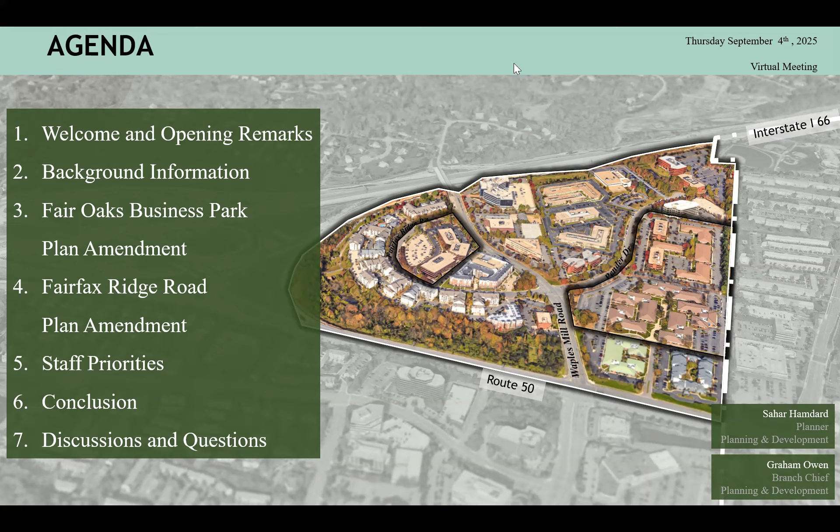Thank you, Commissioner Thomas. And real quick, if I could, I just want to say thank you to everybody that's here. This is your time to learn more about the project, ask questions, get some answers. This will be the first of several opportunities. We have another opportunity, I think, with the Springfield Land Use Committee on the 7th of October. And then, of course, it'll go on to Planning Commission and Board of Supervisors after that. So plenty of opportunity to weigh in, but we got a lot of people here and look forward to hearing your comments. That's all I got.

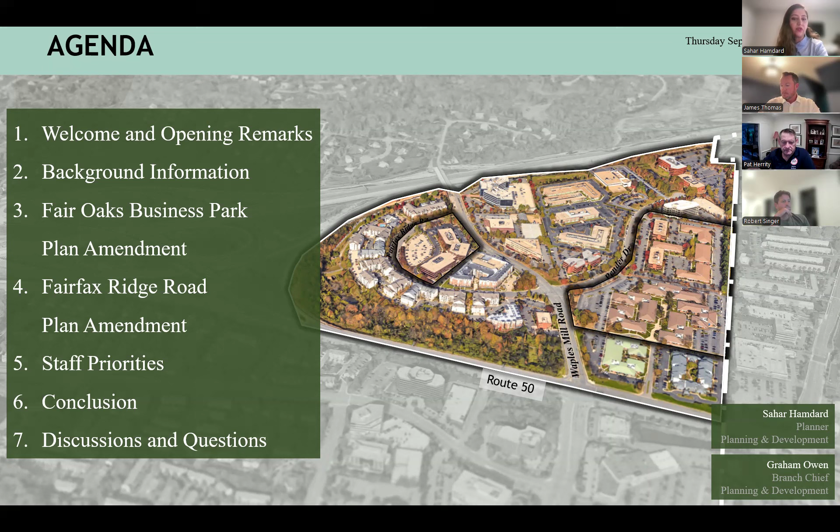The agenda for today's meeting is to discuss the two site-specific plan amendments, Fair Oaks Business Park and Fairfax Ridge Road. We will go over information regarding the comprehensive planning in Fairfax County and the staff priorities for plan amendments. At the end of the presentation, we will have time to discuss questions, comments, and concerns, and we want to hear from you.

On April 11, 2023, the Board of Supervisors authorized the consideration of the Fair Oaks Business Park and Fairfax Ridge Road plan amendments, both of which are located within Land Unit K of the Fairfax Center area in the Springfield Supervisor District. The Board of Supervisors requested that staff consider and evaluate the Fair Oaks Business Park plan amendment for residential mixed use up to 1.2 FAR and 5 to 6-story buildings, consisting of 750 to 900 residential units and 60,000 to 120,000 square feet of office use, ancillary retail use, and potential continuing care or assisted living uses.

Also, the Board of Supervisors authorized the Fairfax Ridge Road plan amendment to consider an option for residential mixed use on the site for up to 400 multifamily dwelling units at 1.5 FAR and 70 feet in height, as well as 2,500 square feet of ground floor retail. Both plan amendments are concurrently under review with rezoning applications.

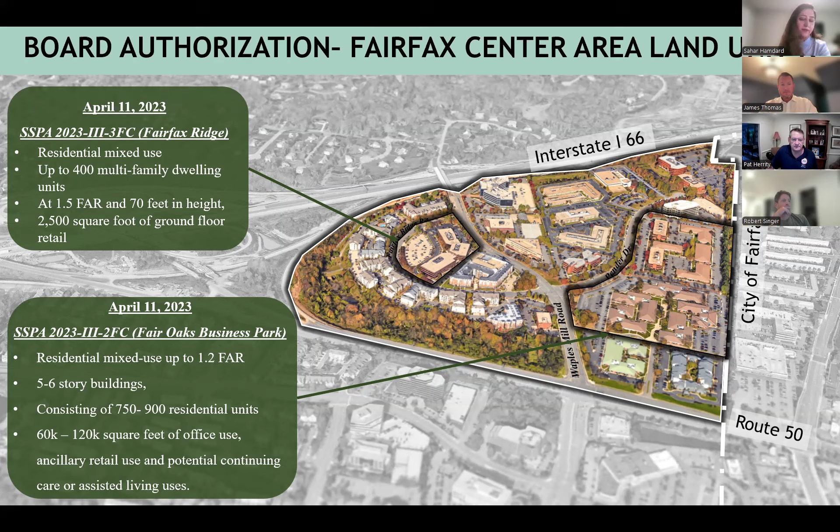During the review process of these amendments, the main comments raised in agencies' comments were the need for major sewer enhancements, interparcel connectivity, and urban parks to serve future residents, all of which have led to an agreement amongst the staff and the supervisor's office that a broader area planning study is needed.

On June 25, 2024, the Board of Supervisors authorized a planning study for the entirety of Fairfax Center area Land Unit K to allow for a comprehensive planning analysis for the broader area, while also allowing the two SSPAs to proceed as individual proposals with consideration of commitments from the SSPA nominator to enhance the sewer capacity in the area to meet the need of future redevelopment potential for the area served by pump stations.

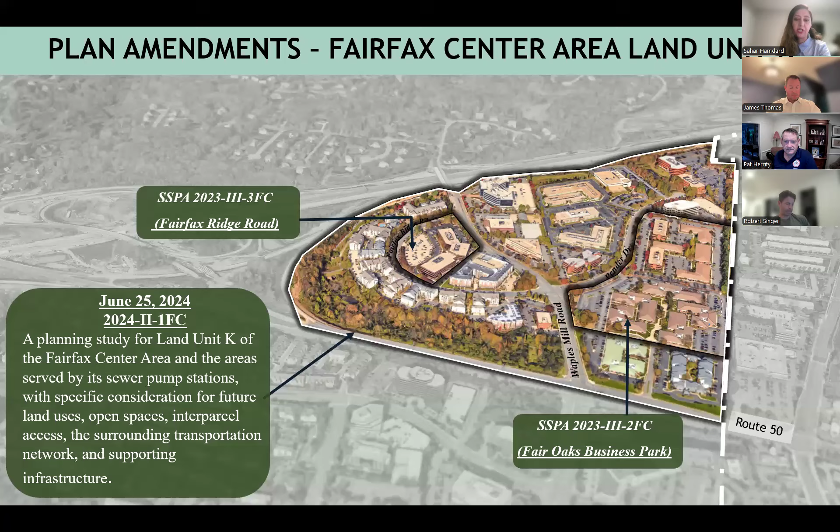As a result, the two sites, Fair Oaks Business Park and Fairfax Ridge Road plan amendments, are proceeding as individual plan amendments as part of the phase 1 study, which includes this community meeting, with the Planning Commission scheduled on October 16, and the Board scheduled for both plan amendments on November 18.

The phase 2 study includes the Land Unit K planning study, and a comprehensive land use, transportation, and park analysis is in review. It's expected to be scheduled for a community meeting and public hearing in fall or winter 2026, when the transportation study is finalized.

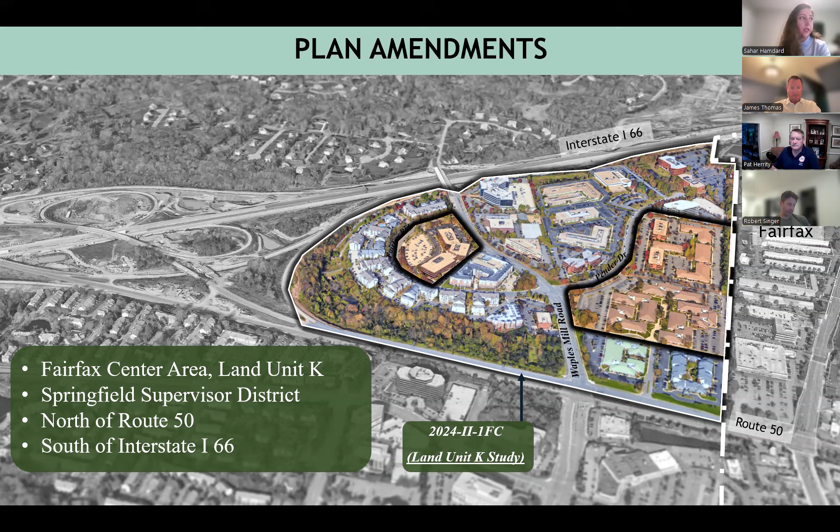Both sites, Fair Oaks Business Park and Fairfax Ridge Road, are located within the Fairfax Center Area Land Unit K, which is north of Route 50, south of Interstate I-66, and east of the city of Fairfax. Land Unit K is developed with office uses, light industrial, hotel uses, and residential uses.

The 22.64 acre Fair Oaks Business Park site is located southeast of the intersection of Waples Mill Road and Pender Drive, currently developed with one-story office buildings totaling 331,000 square feet with associated surface parking. Approximately 1.75 acres of the site is developed with Inova Care Center, which provides behavioral health services for children.

The site is surrounded by office and institutional buildings to the north and west across Pender Drive, a hotel with restaurants, office buildings, and grocery stores to the south, and multifamily and townhouses, residential uses, and commercial uses to the east and city of Fairfax.

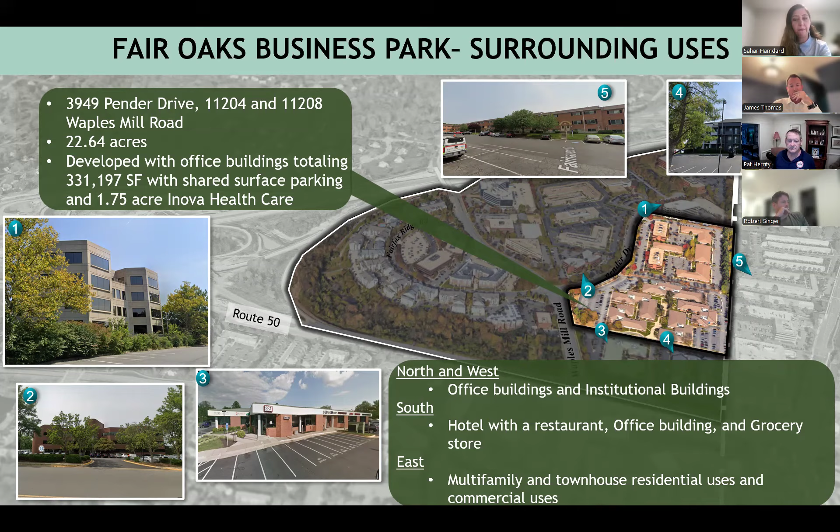The 6.2 acre Fairfax Ridge Road site is located southwest of the intersection of Fairfax Ridge Road and Waples Mill Road, currently developed with an office building totaling 219,000 square feet with an associated parking structure.

The site is surrounded by multifamily residential uses, including the 420-unit Fairfax Ridge condominium community to the north and west, and the 150-unit Radiant at Fairfax Ridge rental community to the south. Office and institutional uses are located to the east across Waples Mill Road.

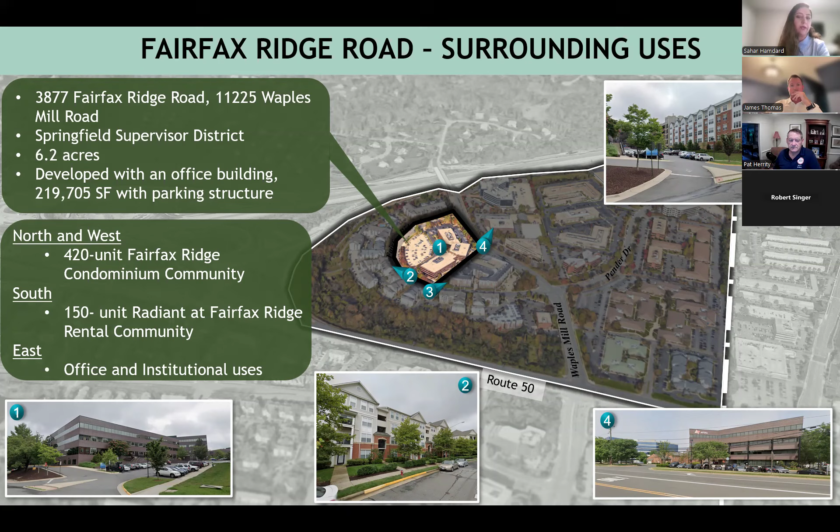The adopted plan for Land Unit K of the Fairfax Center area recommends office use at 0.25 FAR at the baseline and 0.5 FAR at the overlay level.

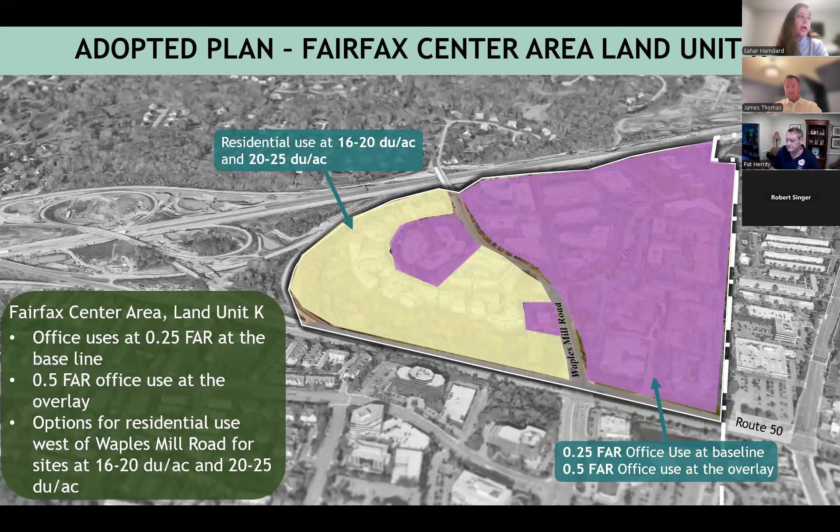Areas west of Waples Mill Road, the plan also recommends site-specific options for residential use at 16 to 20 dwelling units per acre. The model apartment building off Aristotle Drive has been implemented with 16 to 20 dwelling units per acre, and the Fairfax Ridge community has been implemented at 20 to 25 dwelling units per acre.

Additionally, the comprehensive plan's vision for the Fairfax Center area includes guiding planning principles, which provide opportunities for infill development to support the creation of additional activity nodes that include residential, retail, office, hotel, and/or civic uses.

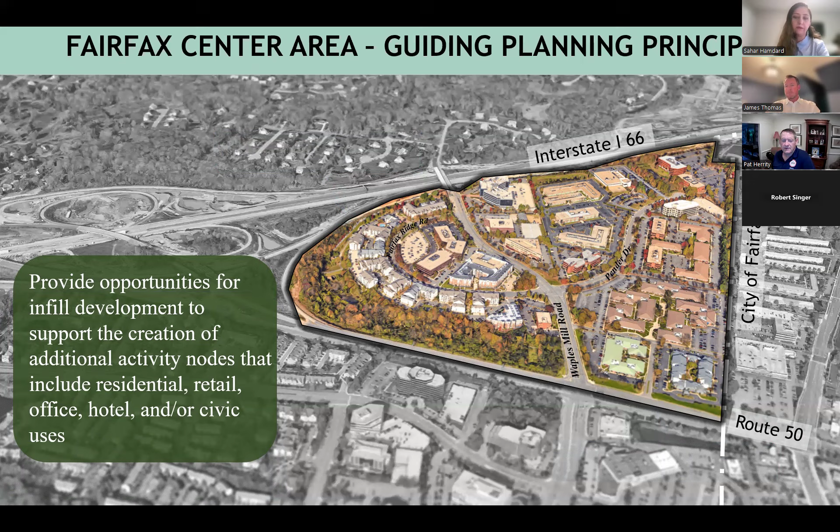Now, what's the comprehensive plan?

The comprehensive plan is the county's primary policy document to guide the use of the county's land and natural resources over the next 20 years. It is a guide for decision-making that reflects the community's long-term land use vision for the future. The purpose of the comprehensive plan is to manage growth and development.

It's important to note that the plan provides recommendations and is not law, like the zoning ordinance. The recommendations in the comprehensive plan are used by the Board of Supervisors, Planning Commission, Board of Zoning Appeals, county staff, and the community as the common basis for decision-making on land use applications.

The comprehensive plan is a living document, and changes to it are called plan amendments.

The concept for future development map is used to explain how all areas of the county are planned. This map provides a general guide and framework for identifying the various types of development that are either existing or encouraged to grow and develop throughout the county over the long term.

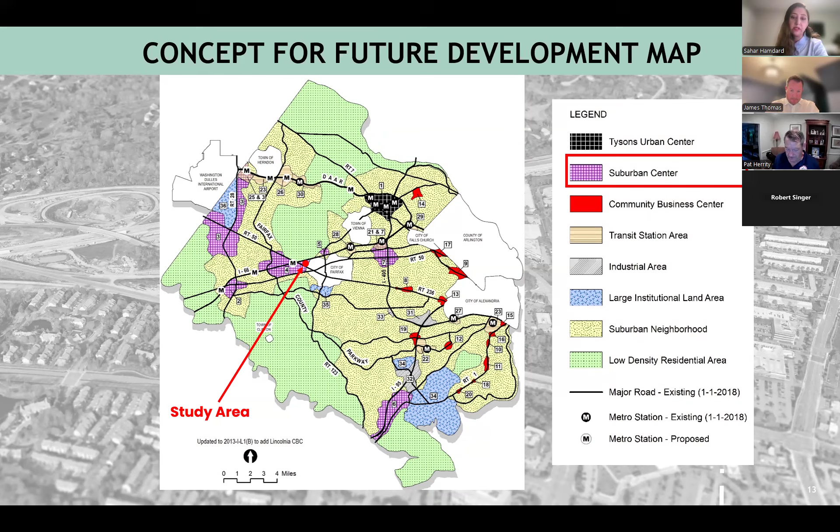Using color coding from the map's legend, we see that Land Unit K, which is pointed out on the map, is identified as suburban center. The comprehensive plan defines suburban center as employment centers located along major roads.

Both plan amendments are in the planning stage, and both applicants submitted a rezoning application, which are concurrently under review.

Density and intensity are the two most common terms used in land use planning to describe the quantity and scale of development that can be established either on a single site or within a defined area.

Floor area ratio, or FAR, is the term most used to describe the intensity of non-residential use and mixed-use development, which often combines both residential and non-residential uses. To calculate FAR, you divide the floor area of building space by the land area of the development site.

Also, residential density is a calculation of the number of dwelling units that can be developed for each acre within a site.

Suburban townhouse development with anywhere between 5 and 12 dwelling units per acre is often considered to be somewhere near the middle of the county's density range.

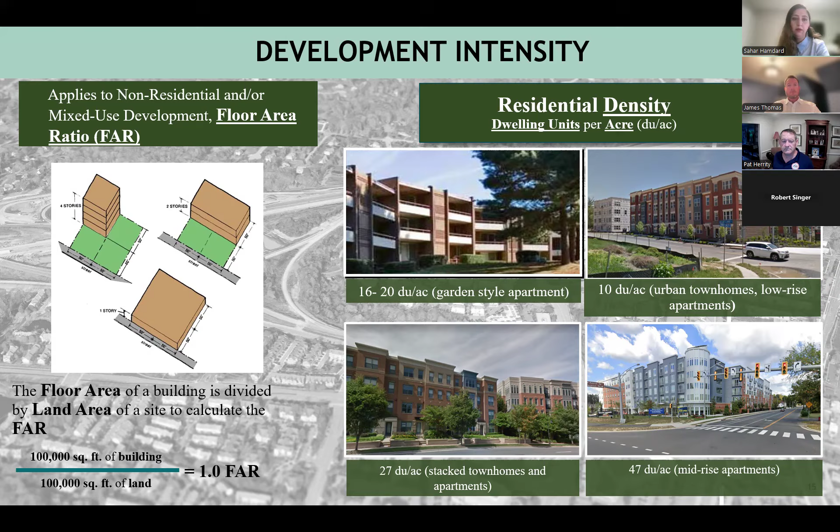The next section will cover the proposals.

The Fair Oaks Business Park proposal considers an option for residential mixed use on the site, including a mix of multifamily and stacked townhomes, office and retail uses. In total, the proposal is for 706 residential units, 77,000 square feet of medical office, and 20,000 square feet of retail uses, with a total intensity of 1.03 FAR.

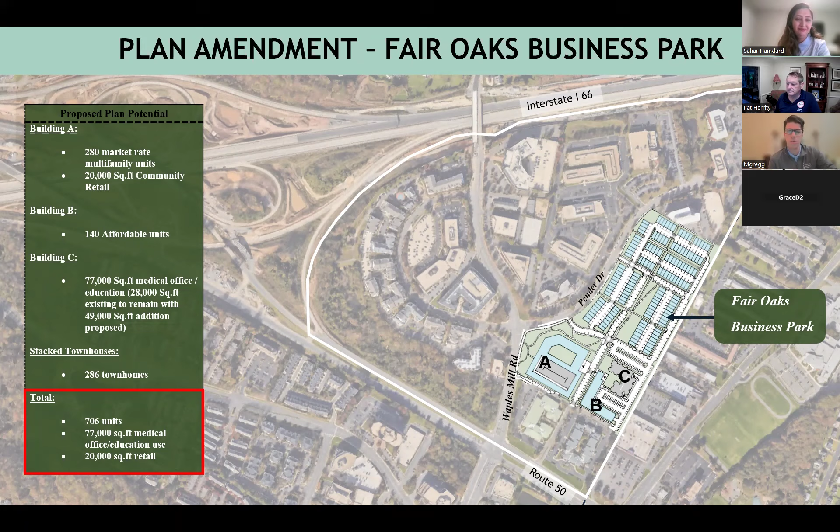Thank you. As you mentioned, this 22-acre property, currently known as Fair Oaks Business Park, we're now calling Fairfax Crossing. It's currently a mix of 1 to 2-story office buildings built in the 1980s. These buildings have reached their useful life. They're mostly vacant, with low occupancy, and not a lot of market interest. What you see here today in its current condition is a sea of asphalt and concrete.

We want to bring into the site lots of green space, walkability, and a vibrant residential community. Outlined in orange is the Inova parcel. Inova is our partner in the development. They're seeking enhancements to their open space and recreational uses, as well as other improvements to their facilities, but they are keeping their existing building in place. Currently, they operate their Kellar School, which provides behavioral health services for children and adolescents, including mental health and substance abuse disorder treatment programs, as well as special education support for families. This is obviously a very vital and underserved service in the area, and as their partner, we're providing them with an opportunity to improve their facility.

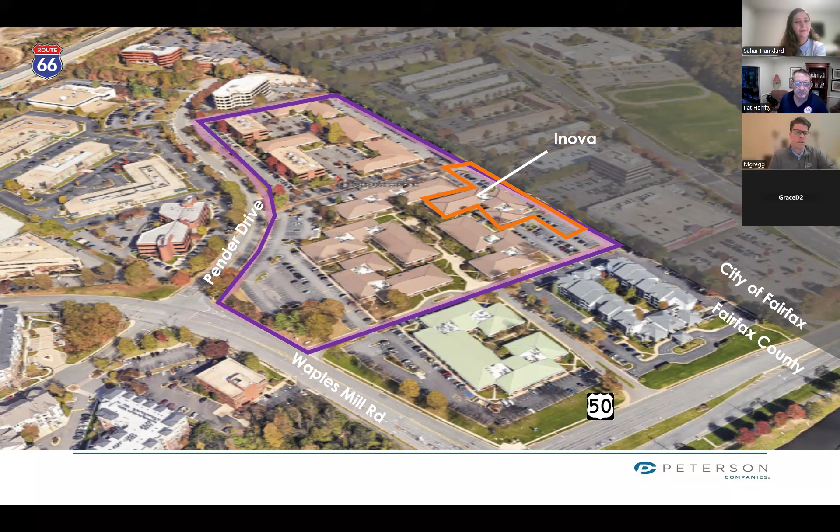We're looking to bring a diversity of housing options into the county. As everyone knows, Fairfax has a mission and a mandate to add additional housing units for people at varying income levels. This development will create a mix of residential offerings, reinvigorating this area of the county. The first building would be the multifamily building, consisting of 280 multifamily units. Then just directly south, the L-shaped building in blue would be our 140 affordable unit building, and immediately adjacent to that is the Inova parcel in the gray roof that's existing to remain.

The remainder of the site is 286 stacked townhouse units. For those of you that attended our last community meeting, you will see the site layout, both from a street grid and a building orientation, has changed. We've worked over the last several months with county staff extensively on the site orientation and layout, and you can see the green space just jumps off the page. We've got over 5.5 acres of community open space.

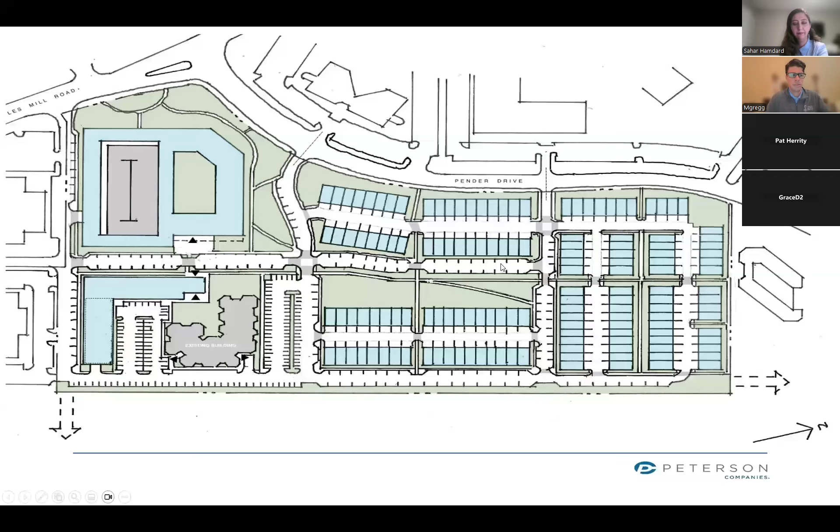We've also used the subtle grade changes across the site to avoid any retaining walls and segmenting that the site may have created, so that we can provide a cohesive development for people to truly mix and not be segmented. I can go to the next slide, please.

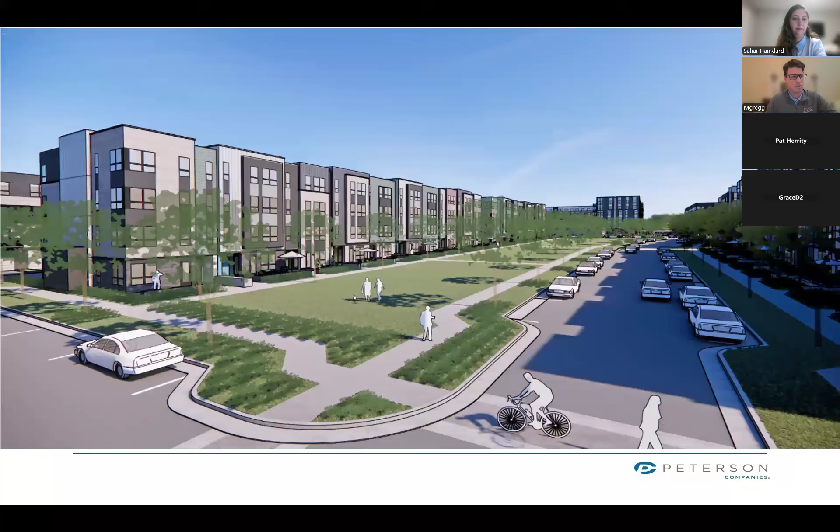And here, this is a very preliminary rendering, a great rendering showing a perspective. This is looking through from the stack flats, looking back. You can see our multifamily building in the foreground here. And what this really shows is just the amount of open space that we've created here.

We're still working on the programming here, but it really gives you a vision or imagery of all this great gathering space and open space and the expansiveness of these linear open spaces. You can really start to appreciate the vision for the site.

And with that, we really look forward to advancing the entitlement process, beginning with this comprehensive plan amendment. We believe this project will serve as a catalyst for revitalizing this part of the county, bringing new energy and expanded housing opportunities. And we look forward to answering any questions you may have. Thank you.

Thank you, Michael. So I will go to the next proposal. The next is the Fairfax Ridge Road proposal, which proposes a mixed-use residential development on the site for up to 400 multifamily units at 1.5 FAR and 70 feet in height, with 5,500 square feet of ground floor retail and a linear park around the building. Lynne Strobel, the representative of the applicant, will provide more detailed information regarding this plan amendment.

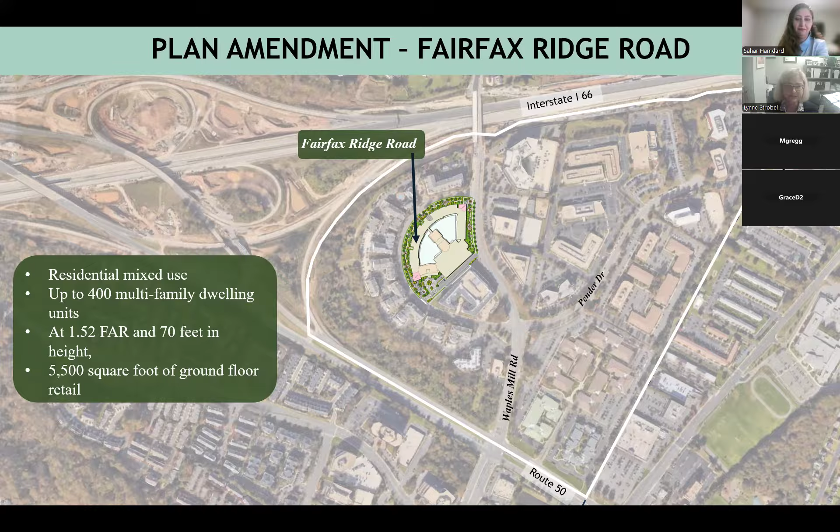Thank you, Sahar. Thank you very much. Again, my name is Lynne Strobel. You all may have seen me before at some of these meetings. I'm with the law firm of Walsh Colucci, and I'm here tonight with Zach Fountain, who is also with our firm. He's a planner, and also our client, the owner's representative, Rob Singer, has joined us as well. So if there are questions that I can't answer, hopefully they'll be able to. So if we go to the first slide, please.

So this is just an aerial view of the property. You can see that the property we're discussing has a dashed line around it. It's about 6.1 acres. I'll try not to be repetitive, but I do think it's important to have a little bit of knowledge of the history of this property, which is located on the west side of Waples Mill Road.

All of this property was originally rezoned to the C3 district. It was originally envisioned to be an office park, and so that evolved over the years. The first thing that happened is that the properties you see on the west side of Fairfax Ridge Road, or Fairfax Ridge Condominium, were rezoned and constructed.

And then several years after that, the multifamily building you see south of our property, on the east side of Fairfax Ridge Road, that single multifamily building next to ours, was also rezoned and developed with residential. So what we're really working on tonight is a completion of the development pattern that began a number of years ago. This is almost like the hole in the donut.

We started looking at that office building that's there—if we go to the next slide—this is what's left of that original vision of an office park. It was built in 1982, and it is served by an above-grade parking garage. And unfortunately, in today's market, as I'm sure everyone's aware, office is not in demand.

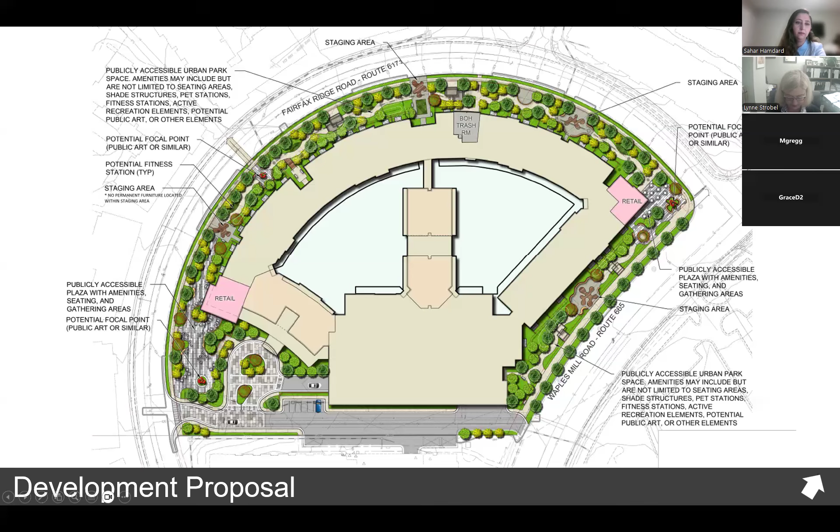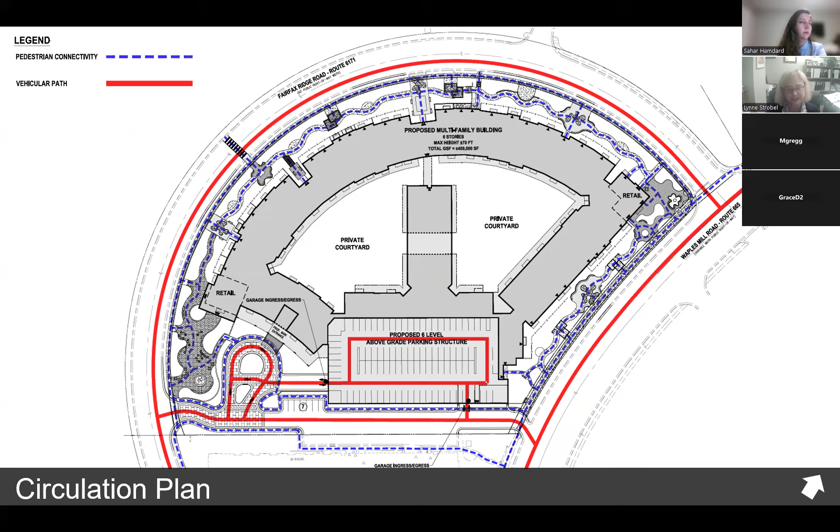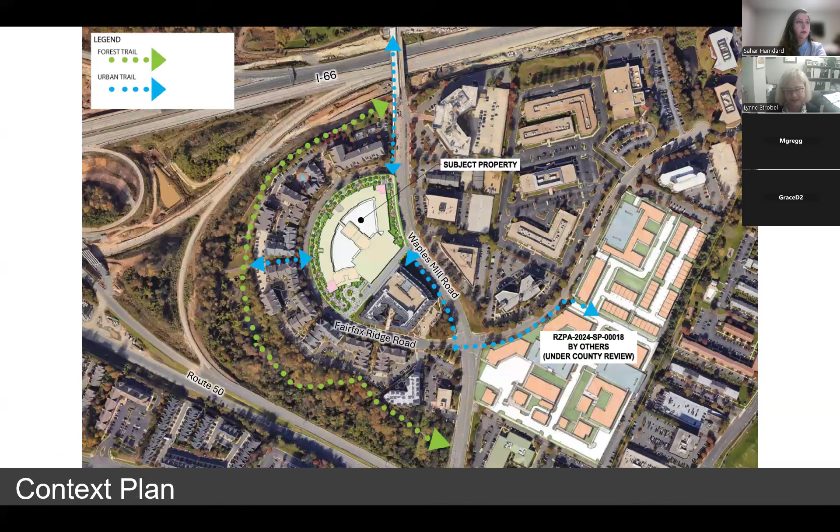If we go to the next slide, we also had a lot of conversations with staff about connectivity. We wanted to make sure there's connectivity through our site, both pedestrian and vehicular. If we go to the next slide, this translates into a broader vision for the area, connecting to trails and sidewalks already in the area.

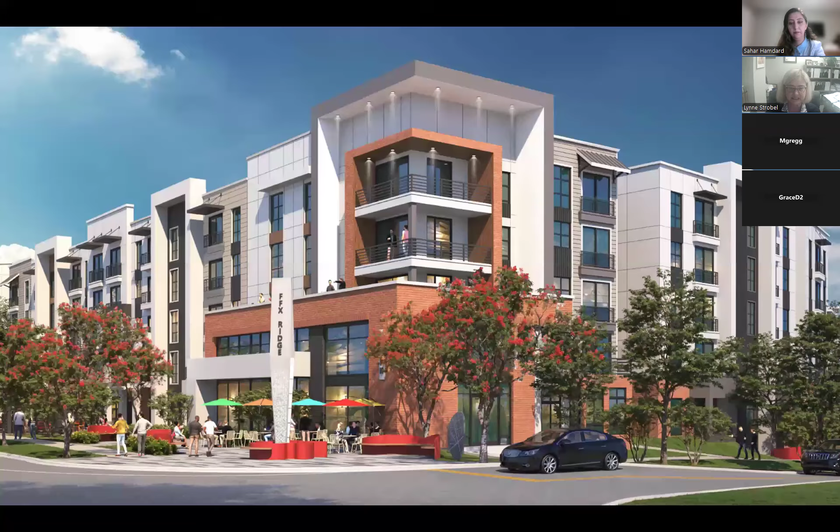If we go to the next slide, we've put together a few visuals to help illustrate what this will look like. We spent a lot of time on architectural design. This is a view from the corner of Waples Mill and Fairfax Ridge Road, showing our retail at the corner with seating, a little plaza area. We incorporated high-quality building materials, balconies, insets, and varied the massing so the building doesn't appear as large as it is. We've also worked with the topography, as the site slopes down from Waples Mill, and while that presented challenges, we've addressed that through building architecture.

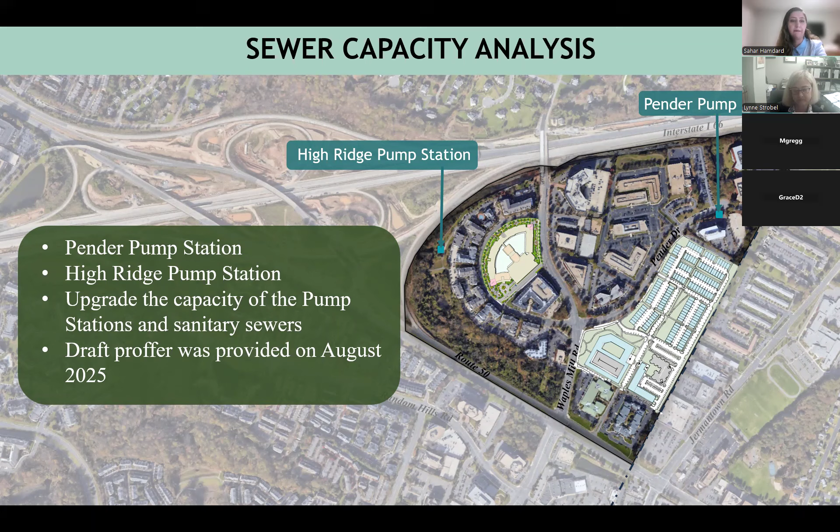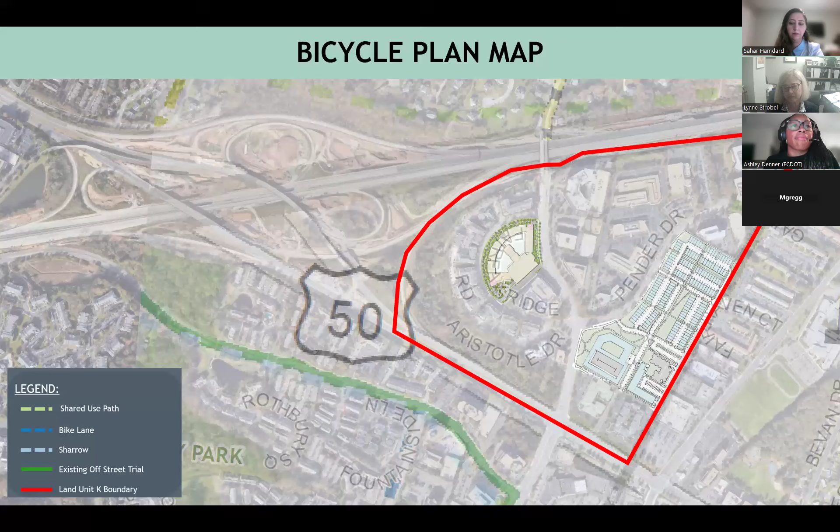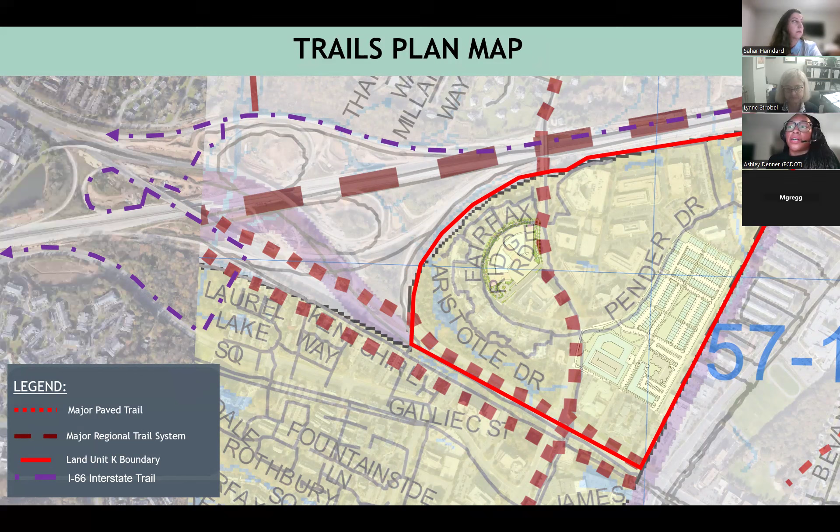Next slide. And then here we have our trails plan map. Currently, within our trails plan map, it recommends a major paved trail alongside Waples Mill Road, which is mostly in place today on the west side of the roadway. There's also a plan for a major paved trail alongside Route 50, and lastly, the planned I-66 major regional trail, which is already constructed and open for use today.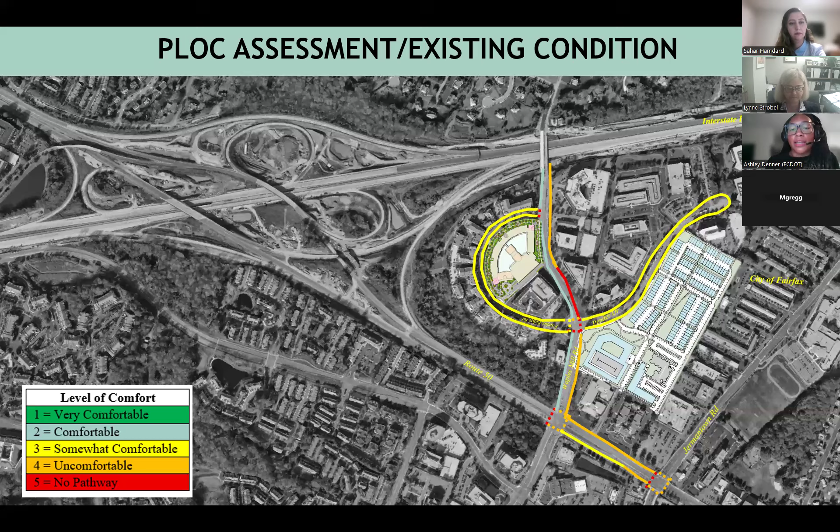Thank you, Ashley. With that, to give you some context regarding the street grid within the City of Fairfax, this is the Kamp Washington Small Area Plan for the City of Fairfax that shows a secondary street or alley on the boundary with Fairfax County. This secondary street or alley is situated to the east side of the Fairfax Business Park Plan Amendment, as shown on the map circled in black. This is the City of Fairfax plan outside of Fairfax County jurisdiction, and the effort is to integrate well with the surrounding development for future planning.

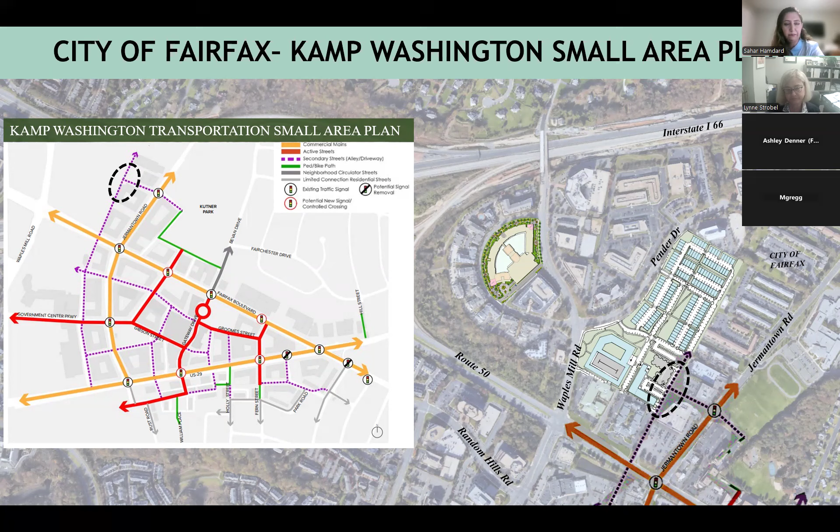The policy plan describes the need to mitigate adverse impacts to park and recreation facilities caused by growth and development. It also offers a variety of ways to offset those impacts, including contributions, land dedications, development of facilities, and others. Land development in the area should address the generated need for urban park space on site in accordance with the urban park framework. Proposed development generates a need for 2.99 acres of publicly accessible on-site urban parks and associated programming per the urban park framework. Both proposals are proposing approximately 3.47 acres of publicly accessible urban parks. The recommendation is to provide integrated open space and on-site active recreation facilities to serve the residents of this complex, and provide pedestrian walkways connecting all portions of the development and linkages to adjacent properties.

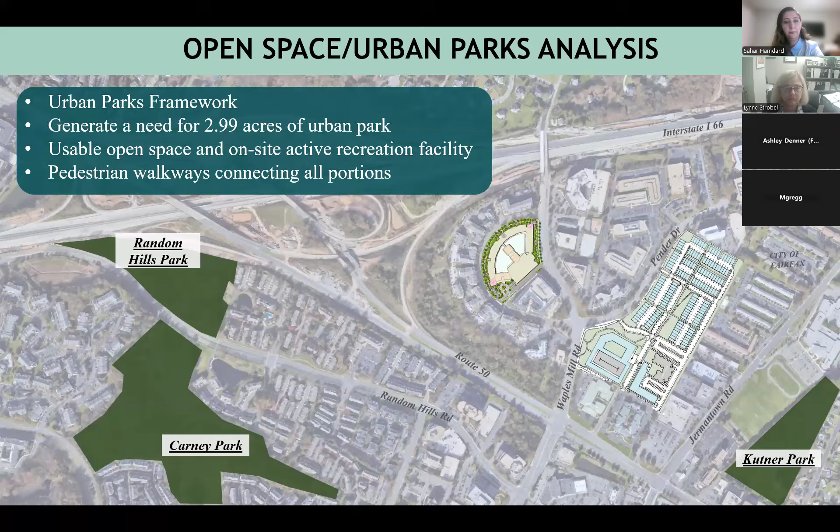Staff prioritized for both plan amendments. Given what we heard from community meetings and the consideration of the impact analysis, tonight we will provide a summary of what staff is prioritizing for the plan text for both plan amendments, and we are still working on it. The draft plan text will be presented with the staff report.

As we have mentioned, the existing sanitary sewer and the pump station serving the area currently lack adequate capacity to accommodate increased demand from additional density or intensity within Land Unit K. So an evaluation of the existing sewer infrastructure capacity should be conducted. Any new development should commit to providing any necessary improvements to offset the increased sewer flow demand for the full build-out of Land Unit K.

Both sites and proposals introduce a residential mixed-use option, and it may be appropriate to be redeveloped. It is recommended to conform with the Fairfax Center area-wide guidance and use-specific performance criteria, along with integration of urban parks, pedestrian facilities, and natural open spaces. Also, residential mixed use should create a vibrant and sustainable living environment with high quality architecture and site design, access to multimodal transportation facilities, and other amenities for residents of all ages, incomes, and ability levels.

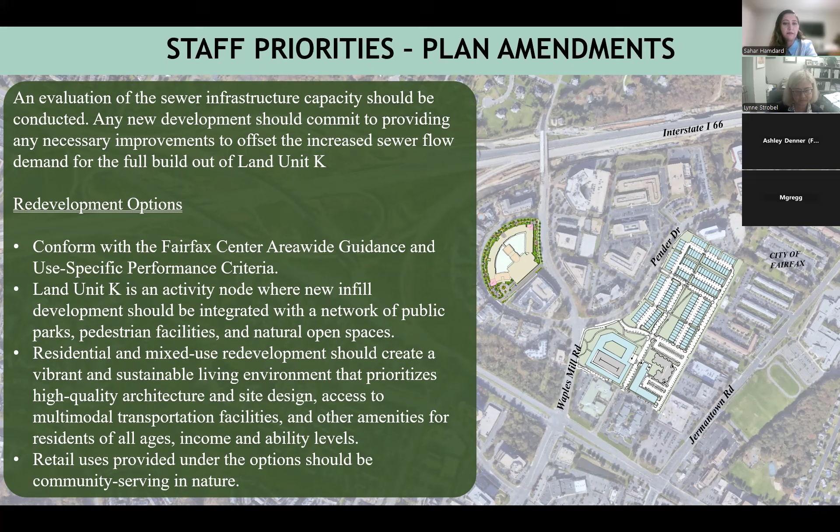This is the staff priorities for the draft specific conditions for the Fairfax Business Park Plan Amendment.

The residential mixed use at intensity up to 1.03 FAR may be redeveloped with consideration of the following criteria: diversity of housing types, high quality site design, provision of urban parks in appropriate locations that serve the community, orientation of townhouses to create an attractive frontage and welcoming neighborhood, compatible transition in height with adjacent residential uses, and consideration of an internal network of streets and active transportation facilities, including streetscape facilities, shared use paths, pedestrian crossings with signals at key intersections, an interparcel connection east from Waples Mill Road or Pender Drive to Jermantown Road through the City of Fairfax, and bicycle and pedestrian facilities throughout the development.

This is the staff prioritization, the draft specific condition for the Fairfax Ridge Road Plan Amendment.

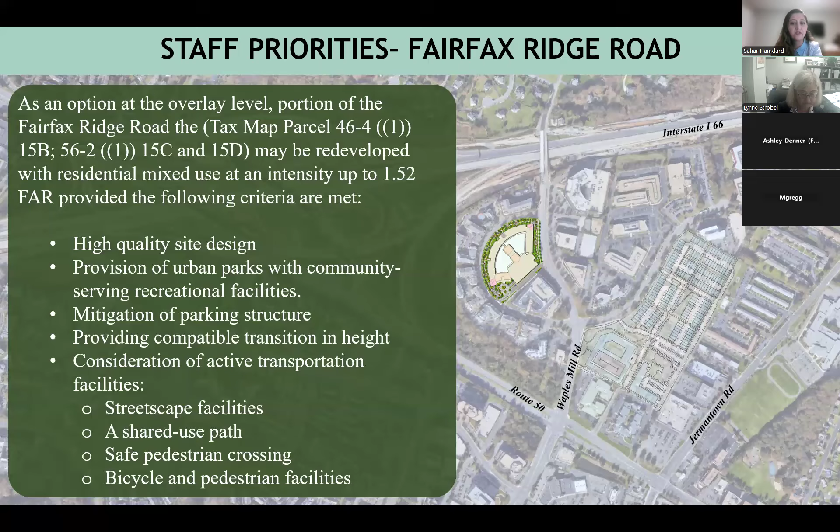The residential mixed use at intensity up to 1.52 may be redeveloped with consideration of the following criteria: high quality site design, provision of urban parks in an appropriate location that serve the community, compatible transition in height with residential uses especially to the west and south, consideration of active transportation facilities including streetscape facilities, shared use paths, safe pedestrian crossings with signals at key intersections, and bicycle and pedestrian facilities through the development.

So what's next? Our next steps include incorporating your valuable community feedback, finalizing the draft plan text, and publishing the staff report on September 25th. We will have an in-person meeting with the Springfield Land Use Committee on October 7th, and the Planning Commission is scheduled for both plan amendments on October 16th at 7:30 p.m., with the Board scheduled for November 18th at 4 p.m.

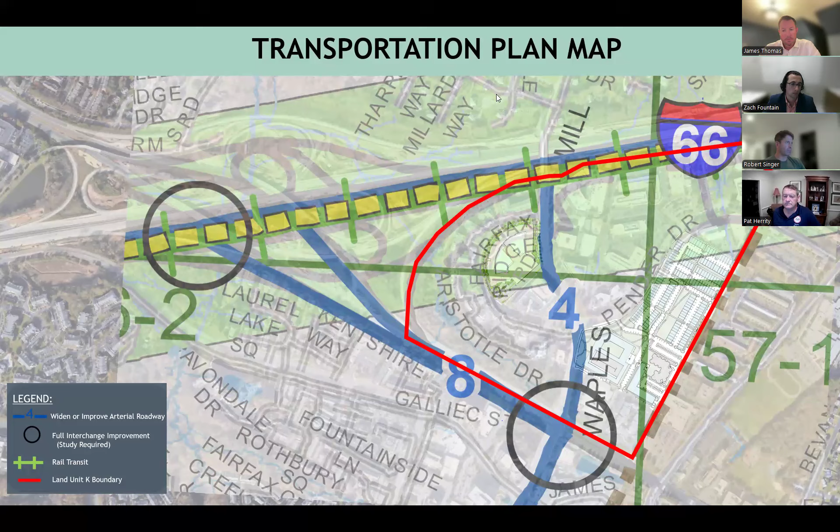I just want to clarify the code requirement—there's something in the chat about it being 1.3 per bedroom. That's not correct. The Fairfax County zoning ordinance establishes a parking requirement based on the number of units. I may be a little off, but I think Rob is right, it's about 1.3 spaces per unit. We were asked at the meeting with the board what our parking equated to if analyzed per bedroom, so that's what we were alluding to. That's not the code requirement—that was just something we were asked to analyze.